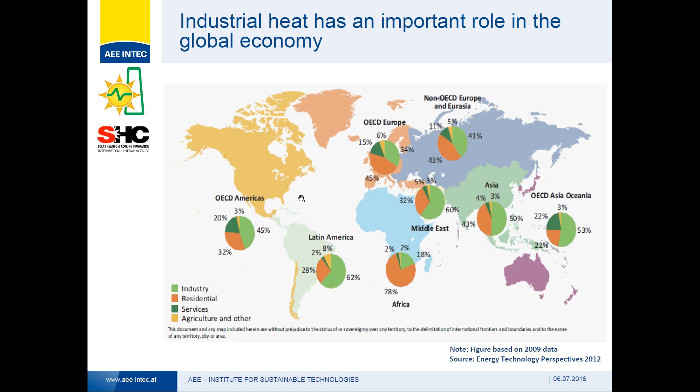If we have a closer look on all continents, you can see approximately 1/3 of the total energy consumption is allocated to the industry, and different to the public awareness that most energy is consumed from electrical sources, you can see here that 74% of this 32% of the total energy demand for industry is thermal energy. This is split into 45% for coal, 30% for natural gas, then 15% for oil, and approximately 10% for renewable energy.

If we look at this 74% for heat, this is approximately 85 exajoule in total, and you can see here that 30% is allocated to low temperature heat, below 150 degrees, 22% is between 150 and 400 degrees, and 48% is everything above 400 degrees for this thermal demand in the industry. You will ask maybe, why is it so important to know these different temperatures? This is linked to the different collector technologies, and then to the efficiency related to these different collector technologies.

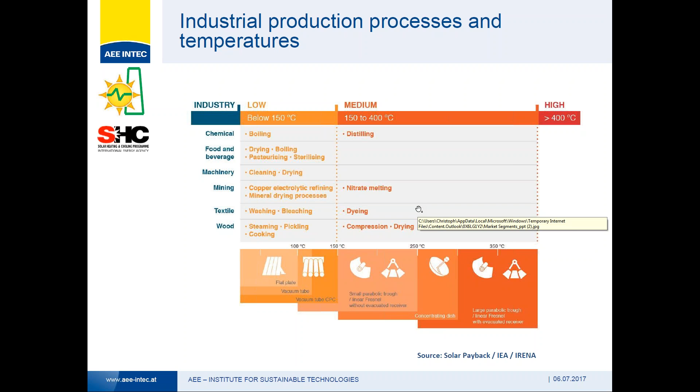So industry sectors, different temperature levels, different processes, and this was the basis for our considerations how to implement solar thermal for different industry sectors. But what are the challenges to implement renewable energy for the industry?

What is clear is that solar thermal will not be the only energy source linked to the supply of energy to industry. There will always be a hybrid system. This means solar technologies will be applied in combination with, for example, biomass or biogas boilers, geothermal technology or heat pumps. The second very important point is we have to implement the different technologies based on exergetic considerations.

What does it mean? As you saw in the earlier slides, temperature is a crucial point, and you have to apply the technology which fits best to the certain temperatures for the processes where the energy is needed.

Then matching of variable solar resources with load profiles, this is quite a challenge. It means on the one hand our solar energy yield has a certain load profile. It starts in the morning, at noon you have the highest yield, in the evening it reduces, and also your processes will have a certain load profile, and this you have to match and find the best solutions.

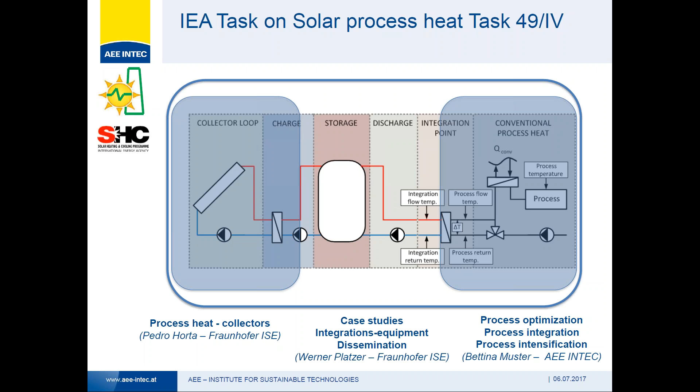This task was built up on 3 different subtasks. On the one hand, process heat collectors, coordinated by Pedro Horta. Then on the process side, process optimization, process integration, and process intensification, coordinated by my colleague Bettina Muster. And then the overall part, case studies, integration equipment, and dissemination, coordinated by Werner Platzer, also from Fraunhofer ISE.

And now I want to go into these 3 thematic areas and give you some examples of the output of Task 49.

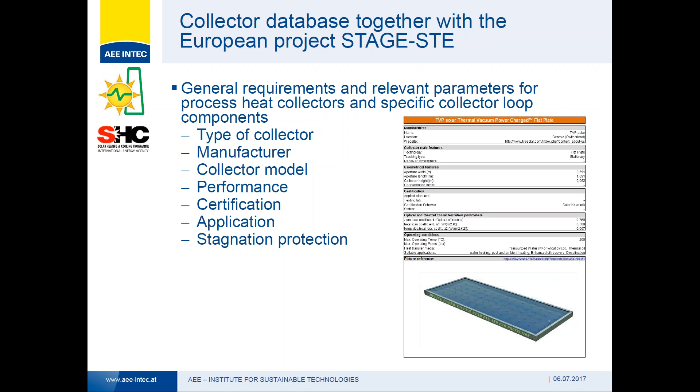So first on the process heat collectors: together with the European project STAGE-STE, a general database for process heat collectors has been developed, and here you can find different information on the type of collectors, on the manufacturers, collector model, the performance of the collectors, of course, which is very important, if it's certified or not, where you can apply this collector best, and also stagnation protections. This is the information you can get out of this database, and with this information it will get much easier to select the right collector type for installers, for planners, etc.

Another output was a report with very practical solutions on overheating prevention and stagnation handling. The main challenge for large collector fields in solar process heat can be these overheating and stagnation problems. What does it mean? If you overheat a solar system or it goes into stagnation, then the efficiency goes to zero and you don't get any energy out of this system anymore.

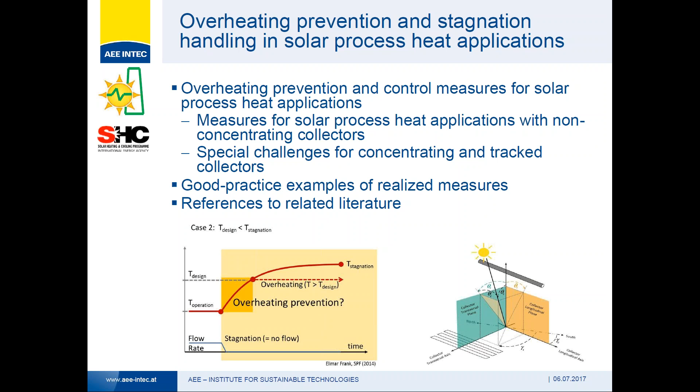And this can happen when, for example, the production process on the company side has a problem. So there's an unforeseen stop of the production, for example. They need no energy anymore, and so the whole system can go into overheating or stagnation. In this report, you get really practical solutions, measures for solar process heat applications with non-concentrating collectors and with concentrating collectors. You get different solutions on how you create and design such stagnation solutions in order to avoid this stagnation problem.

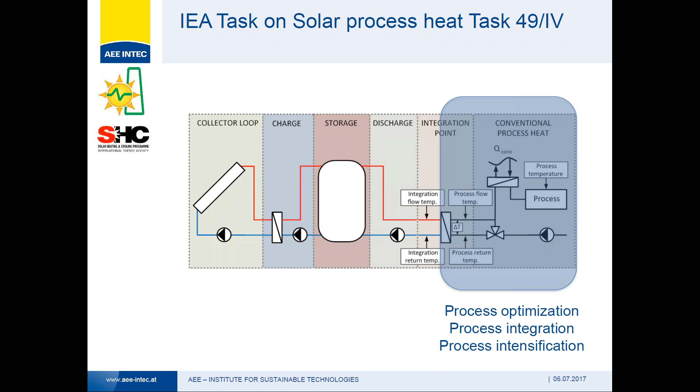Coming to the process side, here we have these different approaches where we say, okay, we want to have a very efficient system on our production process side. This means that we want to reduce our energy consumption first, and after this optimization of our production process, after maybe reducing the temperature levels of our processes, then go in and integrate the solar thermal system. And here it was really crucial to know about the processes, to know about the whole industry where you want to integrate the solar thermal system, to have a very good basis and very good knowledge about this.

In this field, we developed the following tools and programs to reduce these energy consumptions. For example, a software tool and a methodology for creating heat exchanger networks for minimizing the heat demand. We also created tools to identify the right technology for different processes, and also to identify emerging technologies which could be applied in the future. And what is also very crucial is a methodology and a tool to identify the best integration point for solar thermal systems in the industry.

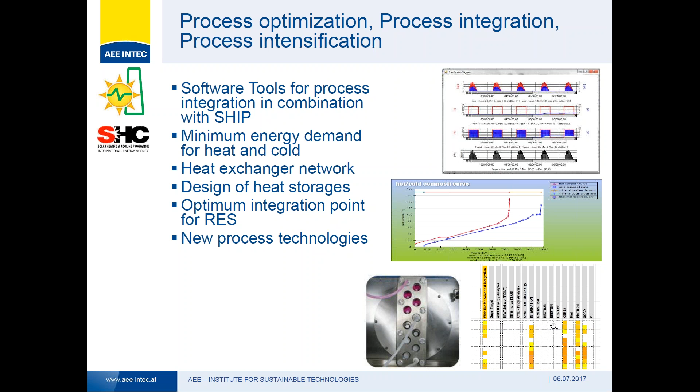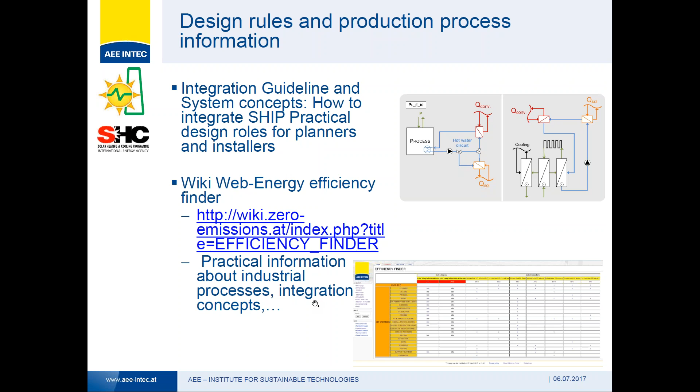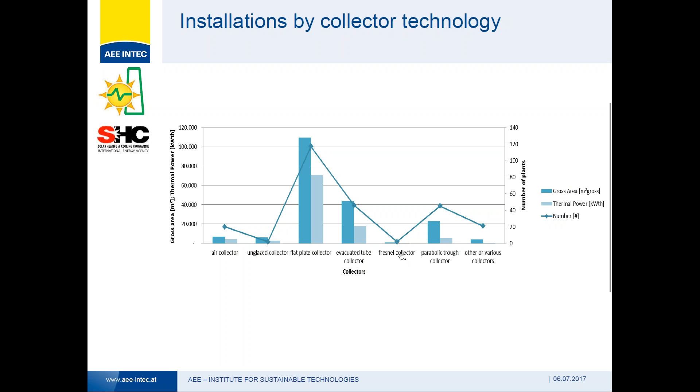For example, the installation of different collector technologies. You can see here the dark green or blue column is the gross area installed. The light green column is the thermal power, and here is the number of installations, and here are the statistics about the different collector technologies. Most of the installations are using flat plate collectors. As you can see, about 98 megawatts are installed for non-concentrating systems, so flat plate collectors and vacuum tube collectors, and about 13 megawatts for concentrating collector technologies like Fresnel collectors or parabolic trough collectors.

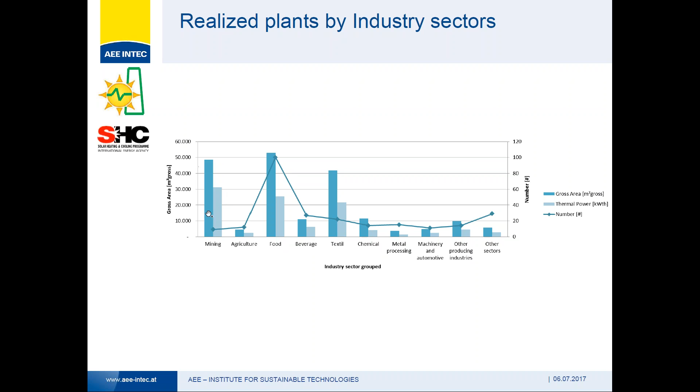Have a look at the installations in different industry subsectors. You can see here that most of the installations are in the food and beverage industry. If you combine these, they are the biggest number. But in terms of gross area or thermal power, the mining industry and textile industry follow and are more or less in the same range. So there's also quite a large collector field and thermal power installed in these two subsectors.

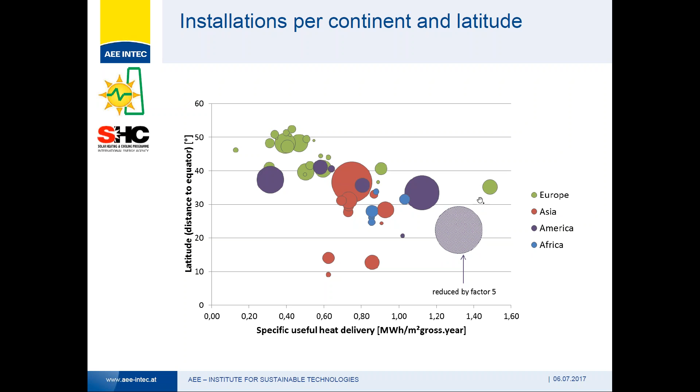And especially here, as you can see, these dots are reduced by a factor of 5 because this shows the biggest installation in Chile, which is an installation for a copper mine. So coming now to some pictures. All these installations are real. You find these pictures also on the website, in this database I showed you.

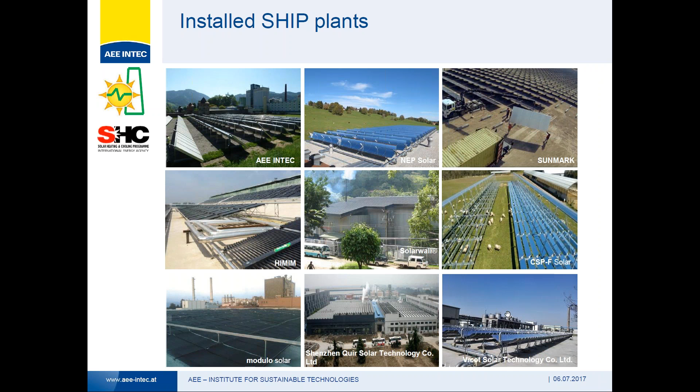Then we have an installation in Mexico for food production, about 3,700 square meters of unglazed collectors, so quite interesting also. They are really producing energy at very low temperature. Then we have one installation in China in the textile industry, 13,000 square meters of flat plate collectors, and again concentrating technology in China for the chemical industry, direct steam generation, feeding this steam into the process itself.

Coming to the end of my presentation, I want to give you an outlook. We are planning at the moment a follow-up of Task 49. This task has the focus on low temperature solar thermal technology, which should be implemented in fluid separation technologies and water treatment technologies for industrial applications and sewage plants. This is the focus of this follow-up task.

These are the four main fields. We want to have a look at thermally driven low temperature water separation technologies. We want to look at low temperature solar collectors as a reactor itself. We want to address water detoxification and disinfection systems, and we also want to summarize them with system integration and best practice examples.

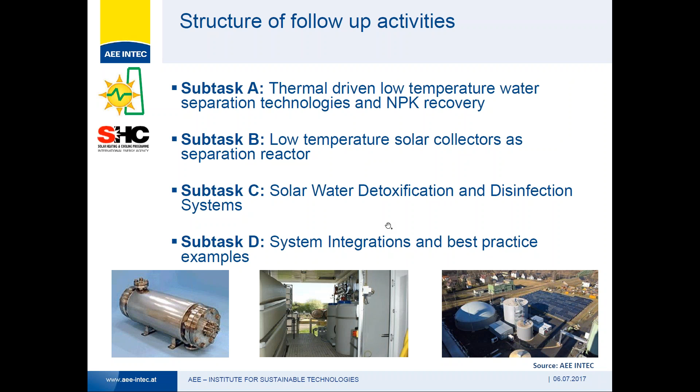For those institutions which think they can contribute to these different fields of application, I really want to invite everyone to get in contact with me, and maybe we can meet in one of the upcoming task definition phases. Good, thank you very much for your attention.

Thank you, Christoph, for your comprehensive presentation. I directly want to go to the next presentation, which is given by Pedro Horta. He will give us an overview of the available technologies, design procedures, and upcoming innovations. Pedro graduated from the Technical University of Lisbon. He has a degree in mechanical engineering and a PhD in technological physics. He is working at Fraunhofer ISE, and he is the head of the group of thermal industrial processes and systems.

He was also involved in Task 49. He was leader of Subtask A, as mentioned by Christoph before. And what's also important, he is at the moment coordinator of the H2020 project, a European project called INSHIP, Integrating National Research Agendas on Solar Heat for Industrial Processes.

And I think you can see here with this project, Integrating National Research Agendas, it's already on a broad scale of interest, because there are several countries who are working on this and have research programs on it. So I'm really looking forward to hearing from Pedro what he can tell us about available technologies, design procedures, and upcoming innovations. Pedro, the floor is yours.

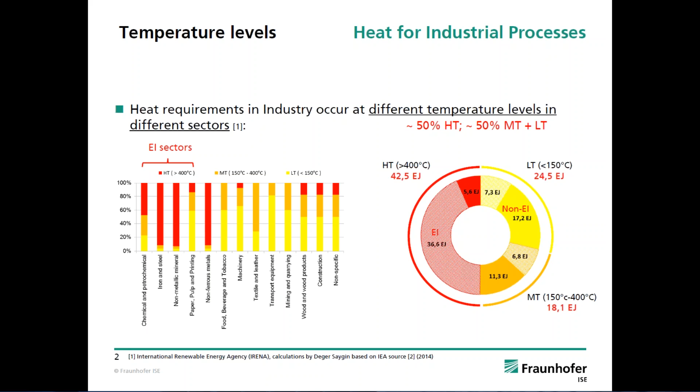And also then there is a distinction between the so-called energy intensive sectors like iron and steel, chemical, petrochemical, and so forth, which have predominantly high temperature processes, and then the non-energy intensive sectors such as food and beverage, textile, machinery, and so forth, which are pretty much in line with what Christoph Brunner presented earlier.

So coming to the technologies and starting from a basic definition on how to assess the efficiency of solar collectors. A very basic concept, for those who are not so well aware of the technology, is that of course the efficiency of a solar collector depends on its operating temperature. And what we know is that thermal losses are proportional to the difference in temperature between the ambient and the collector. So this means that as we go higher and higher in operating temperature, we will have higher thermal losses.

So for us to reduce those thermal losses, there are different strategies which depend on the selection of different materials, on the use of glazing covers, or on the use of concentrating optics, which will represent on one side lower thermal losses. So as we go into higher temperatures, this curve will not be so steep. But of course, at the same time, if we are using glazing, if we are using mirrors to direct the radiation to some specific targets, then we are introducing some optical losses. So what we see between different technologies is always a trade-off between optical and thermal losses.

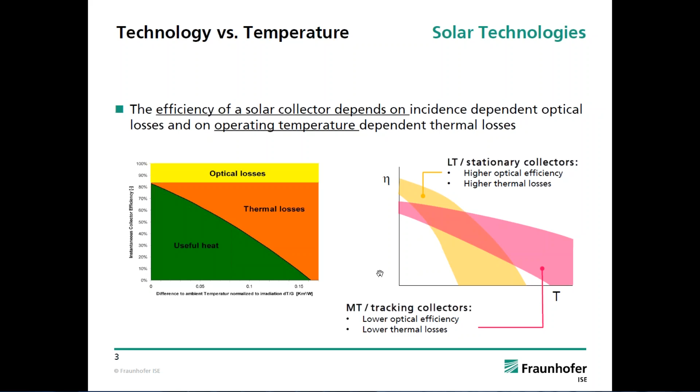So looking into what are the available technologies, stationary collectors present lower operation and maintenance requirements. Normally they present also lower system costs, but of course they are limited in terms of operation temperature, normally to low temperature processes, meaning temperatures below 150 degrees. The two main technologies on stationary collectors are flat plate collectors, with a common temperature range between 30 and 100 degrees, and then evacuated tube collectors, already with some thermal enhancement strategy, vacuum, which present common temperature ranges between 50 and 130 degrees.

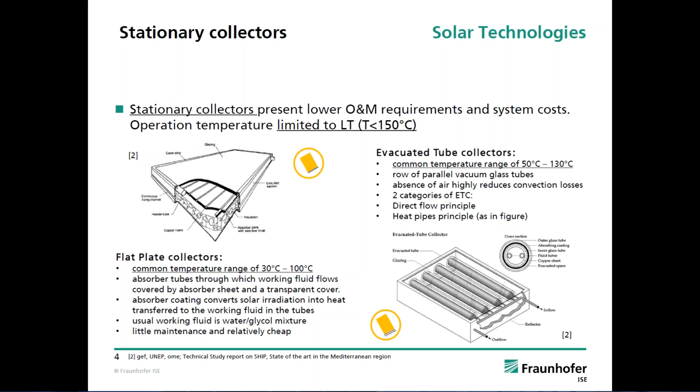Then looking into tracking collectors, so why tracking? All of these collectors use concentrating optics. For those interested in knowing a bit more about that, I would be happy to give you some details. But basically, as we concentrate radiation with mirrors or lenses, the optical effect is to reduce the field of view of the system towards the hemisphere. So that means that if we want to see the sun along the day, these collectors have to follow the sun trajectory along the day. So that's why we call these technologies tracking collectors.

Whereas the third technology, parabolic dish, is a so-called point focus technology, and as the name indicates, the solar beam is directed to a point. So we have a point receiver in this case.

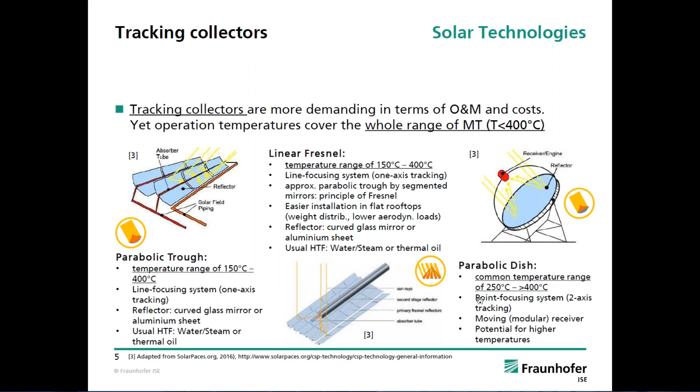So all of these technologies rely on the use of mirrors. So of course mirrors are a very important component in the design of such systems. They might rely or not on evacuated tubes as receivers in the case of line focusing systems, so also a very important component. And they can address a temperature range between 150 to 400 degrees with line focusing technologies, and I'm talking about currently available technologies, and with parabolic dishes we can go maybe a bit higher than 400 degrees.

Well, looking into how to design a solar process heat system, there's one very important first step, which is to realize what's the energy efficiency potential. Because of course, when we invest in a solar system to produce heat for an industrial process, we don't want to waste this heat, because any wasted heat is not going to contribute to our return on investment. So the first step is always to take some considerations into the energy efficiency potential.

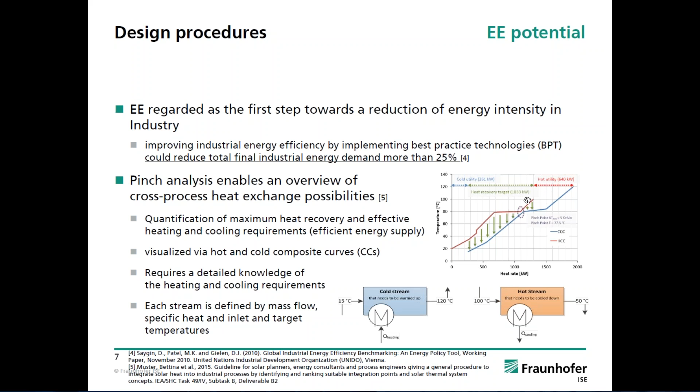So this is the first step to consider where we should act with the heat supply system, with a new heat supply system, which would be the solar system. So basically, our solar system design is going to tackle the effective heat requirements in the company, considering that energy efficiency measures are undergoing or will be taken in the near future.

Then one other very important question is how are we going to integrate solar-driven heat into the plant? And of course, as Christoph already mentioned, there are different integration possibilities, and they are basically classified into supply level or process level integration. When we speak about process integration, we are talking about integrating solar heat directly in one specific process.

This kind of layout has a lot of advantages. The first of all is that we can come much closer to the process temperature. And very often we find in industry processes which are run at rather low temperatures, but they are supplied with steam. So there is a huge difference between the supply temperature and the process temperature. So when we go for a process integration strategy, we can achieve lower temperatures on the heat supply, and we have already seen that lower temperatures mean higher efficiencies, potentially use of simpler technologies.

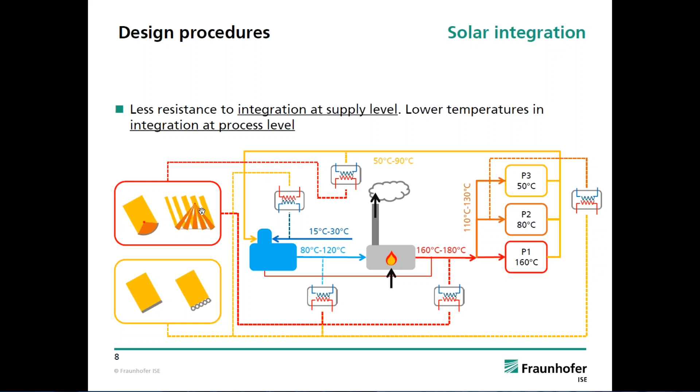So there are some criteria to reach a conclusion on whether to act at supply level or process level. Very important to have in mind that normally industrial end users are very reluctant on process level integration, because of course they don't want to interact directly with their processes. So we have to have that in mind, even if it would be beneficial from the solar design side.

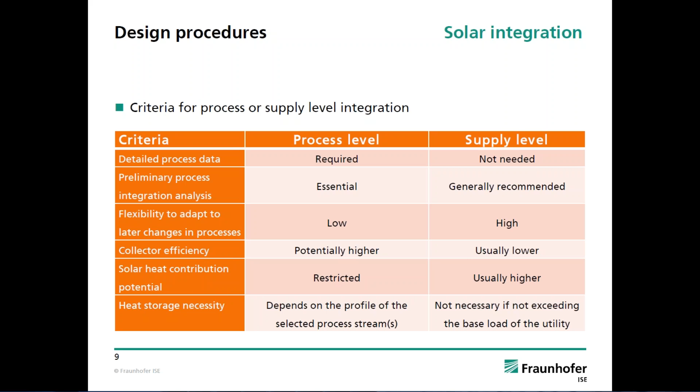Regarding the development of pre-feasibility studies, the objective is to have a holistic planning approach, which starts with the pre-analysis, focusing on what are the boundary conditions for our project. This includes what's the motivation of the company, and also whether or not there is available space to install a solar system. Then we go to analysis of process characteristics and a characterization of the existing heat distribution network.

And finally, we look into possibilities on process optimization and energy efficiency measures. So only after we go through all of these questions, we are ready to start looking into how we are going to design our solar system.

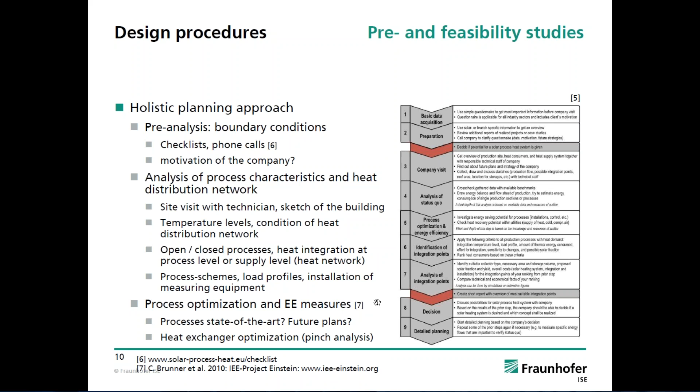So there is a rather comprehensive methodology developed and provided within the framework of Task 49. You will be able to find all of this information in Task 49 publications. I have the references and links in this presentation. You can follow them afterwards.

Then we have to dimension the system, to have a system simulation tool, and there are different tools available. There is a rather comprehensive description and even comparison of such tools in Task 49. I'm providing here some examples of such tools. We have simplified tools such as nomograms. ScenoCalc is a simplified tool provided in the framework of the Solar KeyMark certification scheme for solar collectors. And then we have more sophisticated tools which enable even some dynamic simulation of these systems.

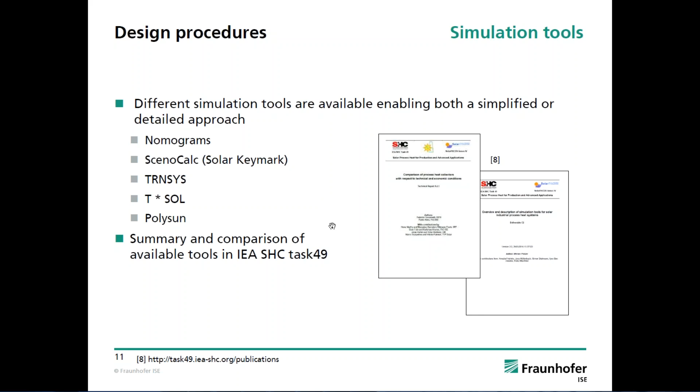Looking into the challenges these technologies face, we have technology challenges and competitiveness challenges. On the technology side, one very evident challenge is, of course, how to tackle higher temperature processes in energy intensive sectors, but then we have also questions regarding how to integrate solar heat at process level, how to include process intensification in this game as well.

Balance of plant questions, how are we going to integrate solar steam in steam networks, how are we going to integrate the collectors in scarce space availability situations, hybridization with other energy sources, durability of these equipments in industrial environments.

And finally, to mention the ETRIA on solar process heat, which started in January this year, is being coordinated by Fraunhofer ISE and has 28 partners all over Europe. We are trying to develop coordination actions towards coordinated objectives and specific research activities, and these research activities are developed at rather low technology readiness levels.

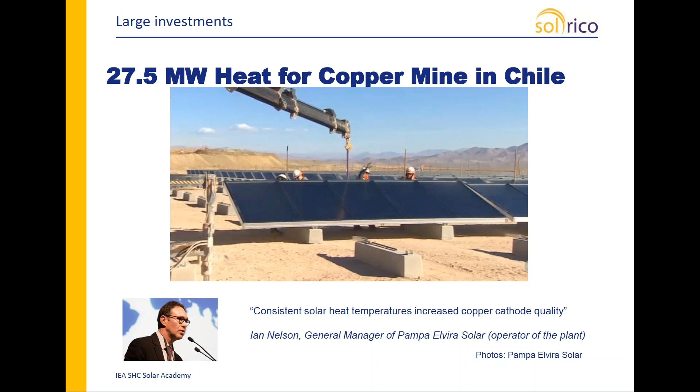The biggest investment at the moment is in Oman, a US $600 million investment, which is being installed at the moment. They are installing the glass houses, which will have parabolic troughs included later. It's a 1 gigawatt plant, which should produce the first steam, parts of it, at the end of the year. And Katie Struble, the marketing director of GlassPoint, the US company building it, told us that it's ahead of schedule and under budget, which is unusual for large-scale projects. Hopefully it's not only propaganda, but I think we should mention to investors that this enhanced oil recovery is a big potential.

There might be more projects coming up also in Kuwait. It means that solar steam is used to heat up oil in the ground or to make it more liquid, so it's easier to pump it up.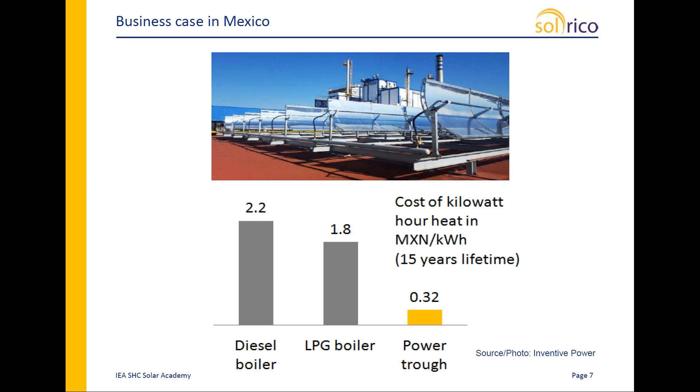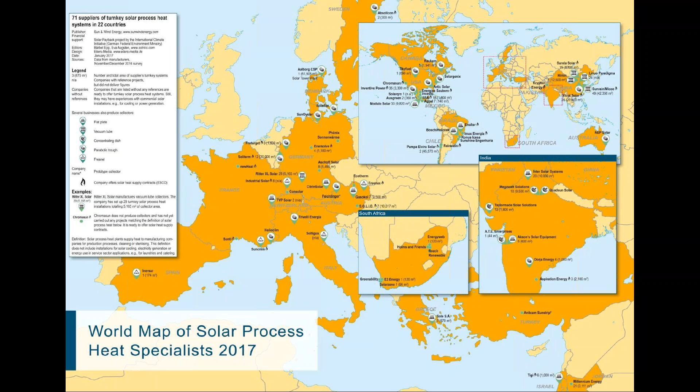In this map, you see always the collector type which the company is producing, but not all of them are producing collectors, some are only offering turnkeys. And you find next to the company name the number of references they did in turnkey SHIP and the collector area they installed. This is showing some of the results of the companies mentioned.

Well, let's see, of the 52 companies which produce collectors on this map, 18 produce or use parabolic troughs for their process heat, 10 flat plate, vacuum tube, linear, and dish is not so strong, and 29 decide to be technology neutral and just offer turnkey. Another important figure on this chart is that already 24 companies are offering heat supply contracts instead of hardware.

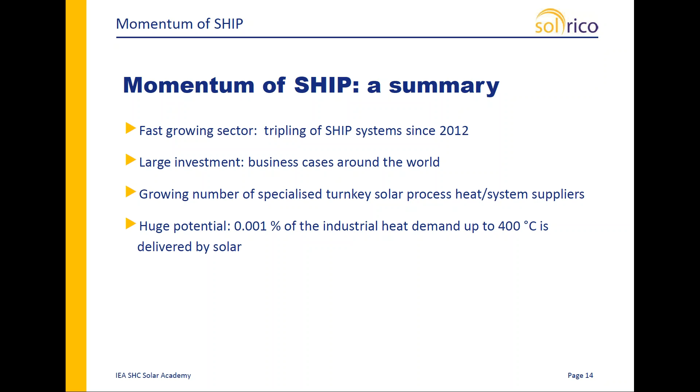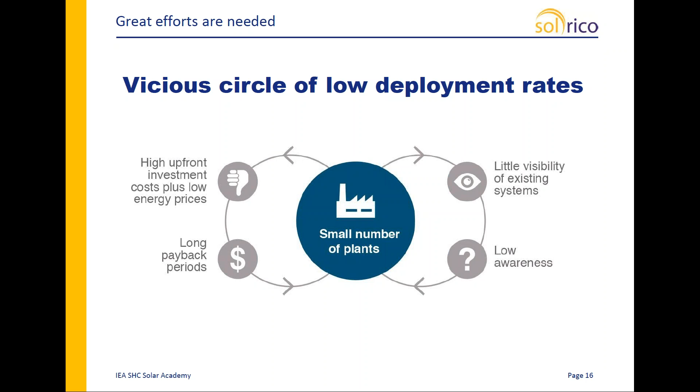numbers. And on the left-hand side, we have this very big bottleneck, which is really harming the suppliers at the moment. High upfront investment costs plus low energy prices bring the payback periods up and also make it very difficult to sell. So I think we don't have to hide, and we have to make it very clear to decision makers at all levels that the potential is big, all the momentum is there, but it needs strong support and a great effort to

make this happen. And we have asked the SHIP suppliers for their assessment on market difficulties during our world map survey, and 54 of them mentioned difficulties with securing funds as one of the main retarding factors. 33 believe that huge efforts are needed to make solar process heat projects bankable. So the financing, which Pedro mentioned at the end of his presentation, weighs as strong as technical issues.

And very important as well, 79% see heat supply contracts and ESCO models as an important means to increase deployment. But so far, as I said before, only 24 are offering it, because it's also a high risk for a small ESCO company or a solar thermal system provider to take the responsibility for a long investment. So we stress 3 ways to break this vicious circle.

I think there is a great need for further communication towards policymakers, but also towards potential customers via associations and conferences. So the communication needs are incredible. We need financial supports which are intelligent. It's not in all cases subsidies, but it can be also reducing risks by giving heat supply guarantees for smaller investors. There are very different activities, but financial models and reducing risk is a very important issue, because this is stressed a lot by the SHIP suppliers.